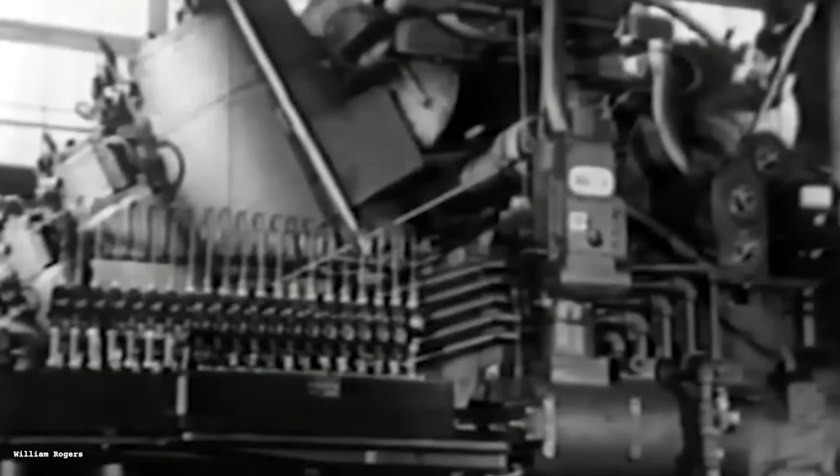The dark story behind the Cooper-Bessemer GMV, the engine that moved America's gas and was buried. Two brothers started a company in Ohio with $50 from the sale of a horse. 103 years later, the engine their company built was quietly running the entire American natural gas pipeline system.

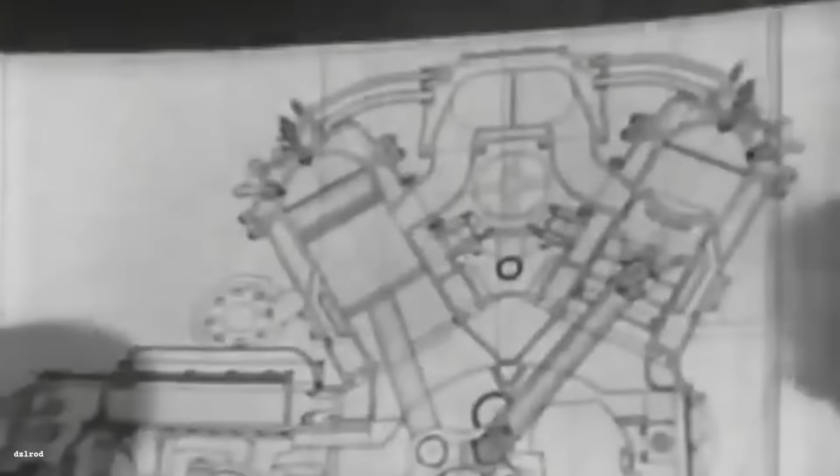Then the company grew up, moved away, and changed its name until nobody recognized it anymore. The engine kept going. Some of them are still running today. In fields, alone, in the dark.

Mount Vernon, Ohio, 1936, population around 8,000 people. Nobody outside of Knox County had heard of it, and most people inside Knox County had never left it. But there was a factory on North Sandusky Street that built things the whole world needed. It started, as most great American stories do, with almost nothing.

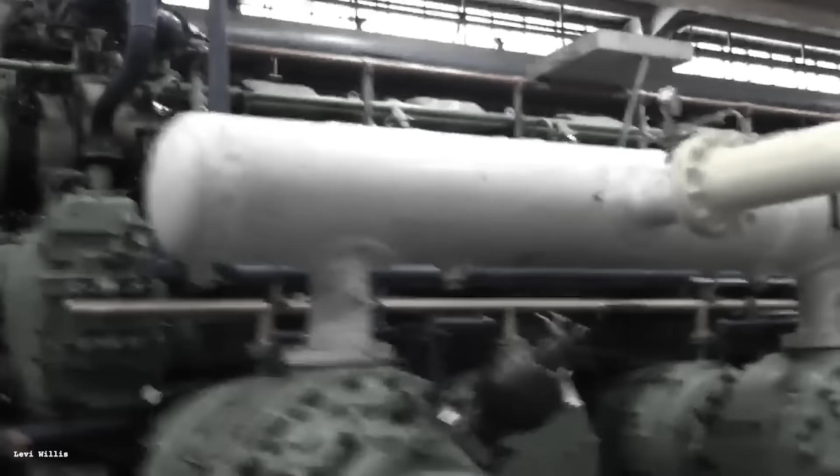It's 1833. Charles and Elias Cooper were two brothers from a farm south of town. They wanted to open a foundry. Between them, they had one surplus horse. They sold it. $50. That was the startup capital for what would eventually become one of the most consequential industrial companies in American history. For the first few decades, they made plows and kettles and iron stoves, standard foundry work.

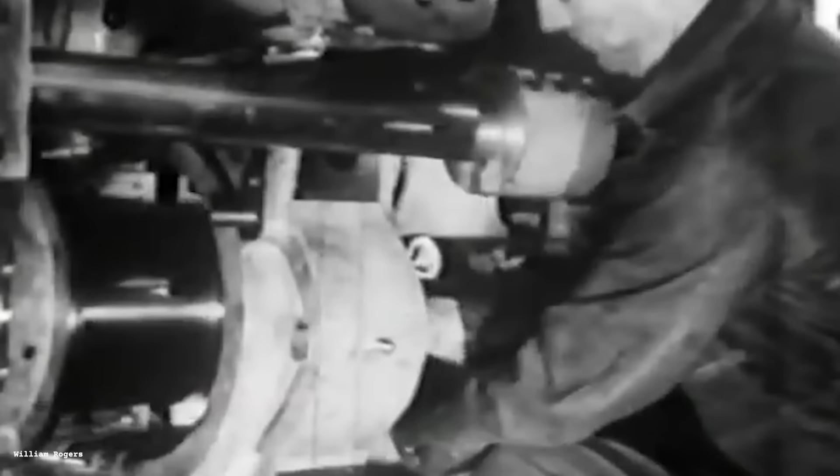Then they noticed something. Steam engines were everywhere, and the good ones were scarce. By the 1860s, they were building Corliss steam engines, the large industrial kind that powered mills and factories across the Midwest. By the 1870s, they had produced what was essentially the first commercially viable American farm tractor. And the Cooper Company kept finding the next thing before everyone else did. The next thing, in the early 1900s, was natural gas.

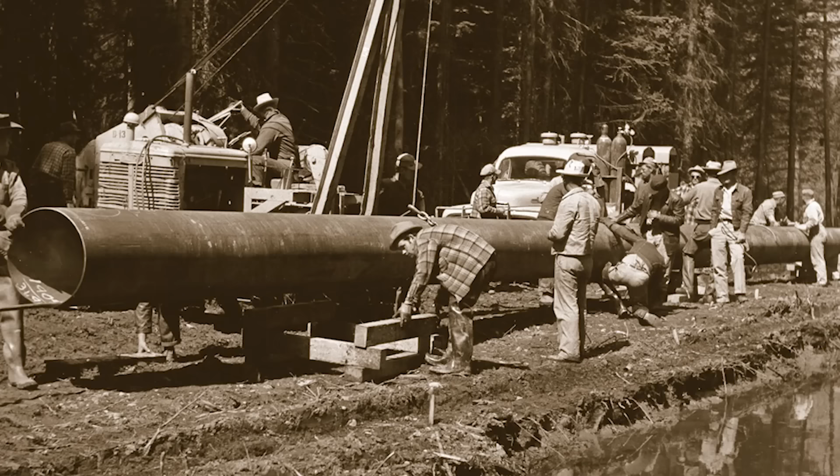There were deposits everywhere in the American Midwest, and nobody had figured out how to move the stuff efficiently over long distances. You needed pressure. To maintain pressure over hundreds of miles of pipe, you needed compressor stations. And to run those compressors, you needed engines. Powerful, reliable, slow-speed engines that could run continuously without breaking down for years at a time in a field somewhere with minimal supervision. Cooper was building exactly those engines, and they were getting good at it.

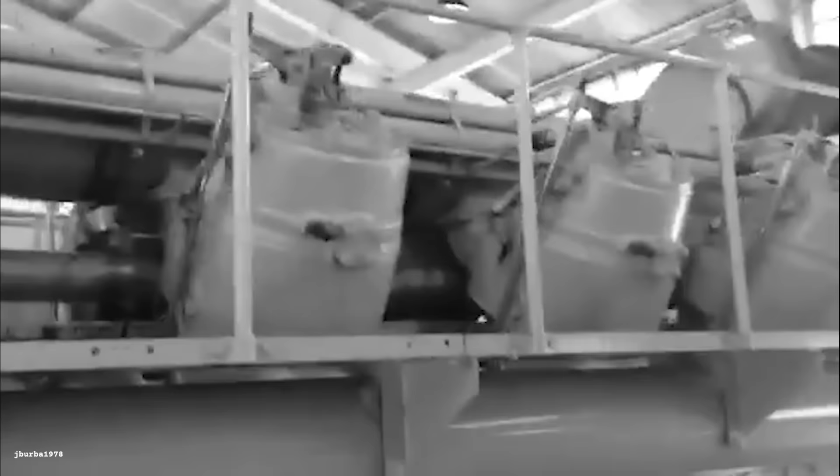In 1929, the C&G Cooper Company merged with the Bessemer Gas Engine Company of Grove City, Pennsylvania. Cooper needed more production capacity. Bessemer needed capital. Both had been posting nearly identical earnings for 3 years. It was a clean match. The new company was called Cooper-Bessemer Corporation. They listed on the American Stock Exchange. They were, briefly, the largest builder of gas engines and compressors in the country.

Then the stock market crashed in October of that same year, and they went from the largest builder in the country to barely surviving. For a while, you could walk up to the factory in Mount Vernon and run a machine for $5 a day if something broke down. That was the Great Depression at Cooper-Bessemer. Sales dropped more than 90%. The plant shut completely for months. But they survived it, and what came next was the engine that made everything.

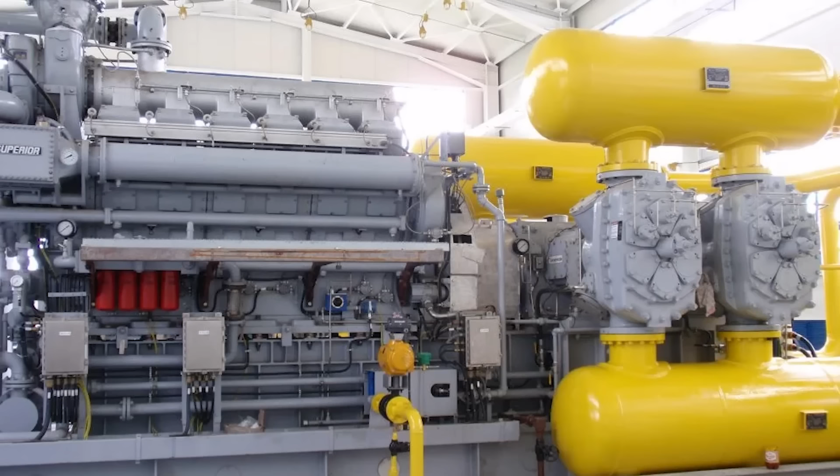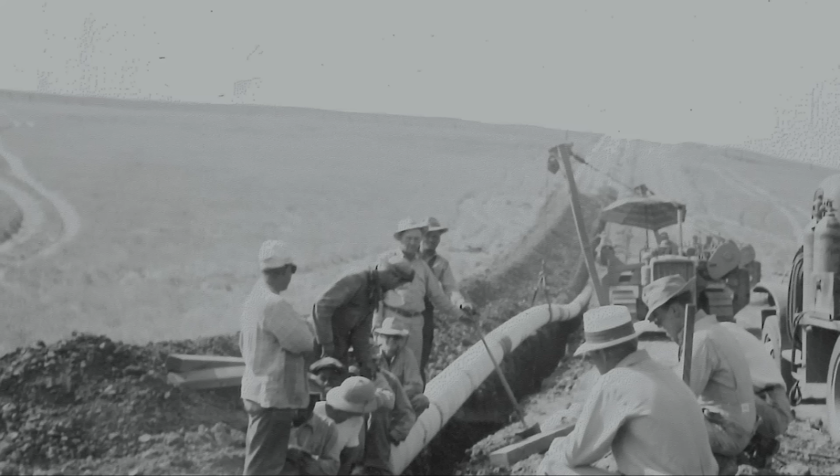Here is the problem that a man named Ralph Boyer was trying to solve in the middle of the 1930s. Natural gas was abundant in America. The Midwest and the South were full of it. The Northeast needed it. The coasts needed it. Moving it from one place to the other required pipelines, and pipelines required compression. Without compressor stations placed every 50 to 100 miles along the route, the gas simply stopped moving. The pressure bled off, the flow rate dropped, and the pipe became useless.

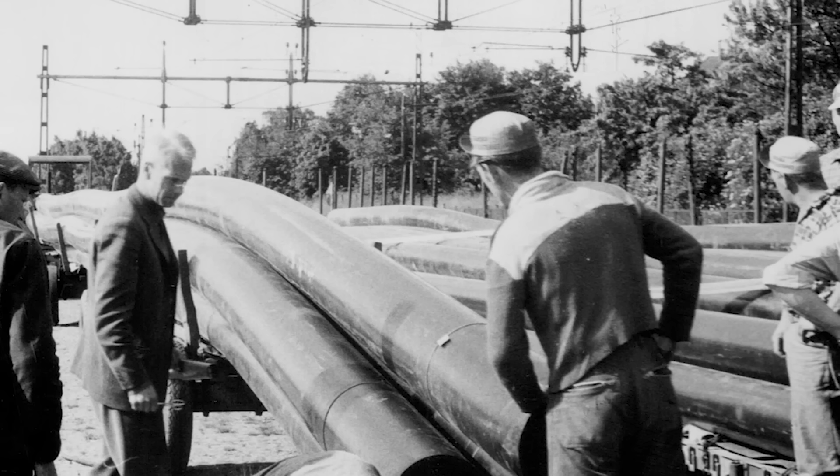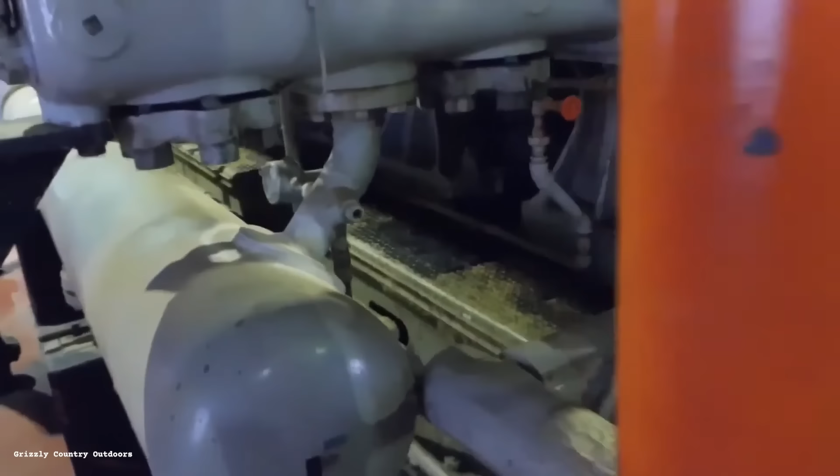The compressor station was the answer. A building somewhere in a field, housing an engine powerful enough to take the gas at whatever pressure arrived from the previous station, boost it back to pipeline pressure and send it on its way. That engine had to run continuously, not when someone felt like turning it on. Continuously. 24 hours a day, 7 days a week, 365 days a year, sometimes for years, without stopping.

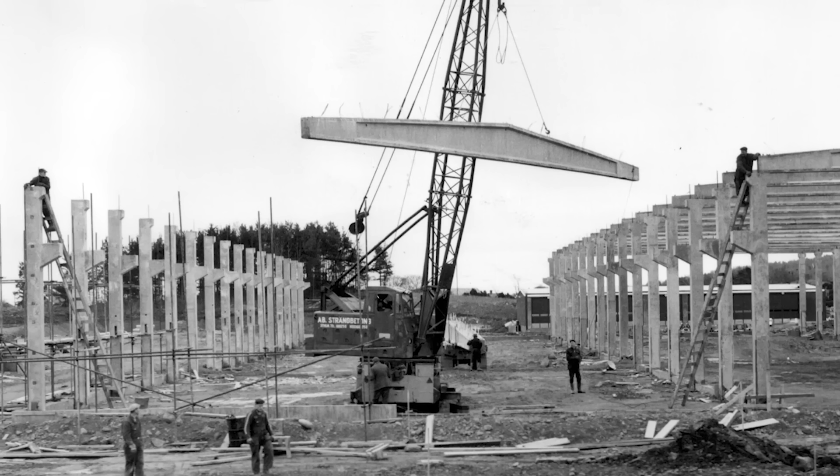The existing compressor engine designs in the 1930s were not built for that. They were large, they were complicated, they had too many parts that could fail, and they were not efficient enough for the economics of long-distance pipeline operation. Pipeline companies were building infrastructure worth tens of millions of dollars. They were not going to stake that investment on a machine that needed constant attention.

Boyer's assignment was to design something that didn't break down, something compact, something efficient, because gas engines running continuously consumed enormous amounts of fuel, something simple enough to be maintained by mechanics in a field, not engineers in a laboratory, and something reliable enough to run for decades without fundamental revision.

He had joined Cooper-Bessemer in 1926, and he would spend the next 4 decades there. The GMV was his answer. It was not a quick answer, and it came with consequences nobody saw at the time.

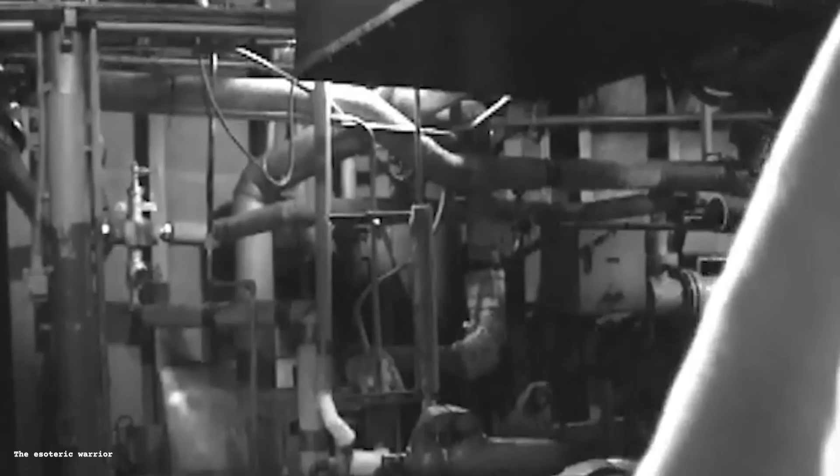The Bessemer merger in 1929 gave Boyer something he needed. Not just additional factory floor space. It gave him access to the Bessemer Gas Engine Company's engineering heritage. Bessemer had been building gas engines since the 1890s. Their people had spent 30 years learning what worked and what failed in continuous duty industrial applications. When the two companies merged, that accumulated knowledge came with them.

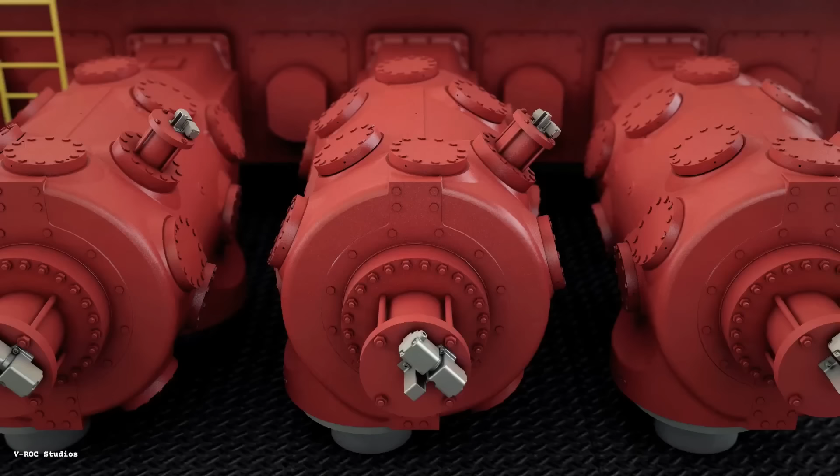Boyer spent the early 1930s experimenting. The fundamental challenge was mechanical. A gas engine and a gas compressor are very different things. An engine takes fuel and produces rotation. A compressor takes rotation and produces pressure. To combine them into a single unit, you had to make one machine do both jobs simultaneously, from the same crankshaft, using the same power strokes.

The standard approach at the time was to run compressor piston rods side by side with power piston rods, all attached to the crankshaft in separate throws. It worked. It was also bulky, generated high bearing loads, and had more moving parts than necessary. Boyer thought there was a better way.

His solution was the articulated connecting rod arrangement. Instead of running power and compressor rods in parallel, he designed them to share a single master rod. 2 power piston connecting rods drove onto one master compressor rod for each throw of the crankshaft. The angle between the engine cylinders and compressor cylinders formed a V-shape, compact, mechanically efficient, and with significantly lower bearing loads than the side-by-side approach.

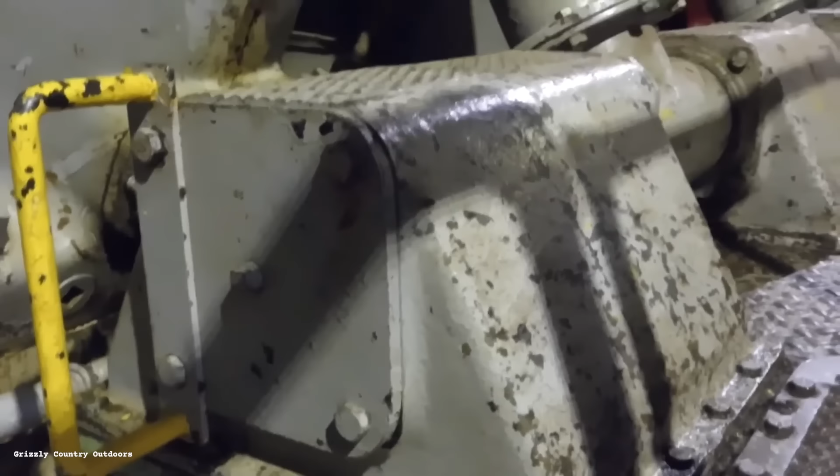Lower bearing loads meant less wear. Less wear meant longer service life. Longer service life meant exactly what pipeline companies were asking for. Boyer had the design, he had the factory, he had the backing of the merged company. The first GMV units came out of the Mount Vernon plant in 1936. They ran, and then they ran some more, without stopping, without complaint.

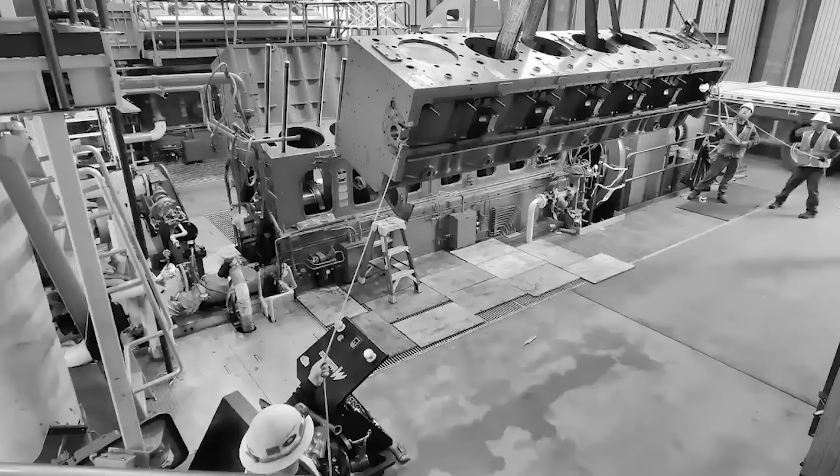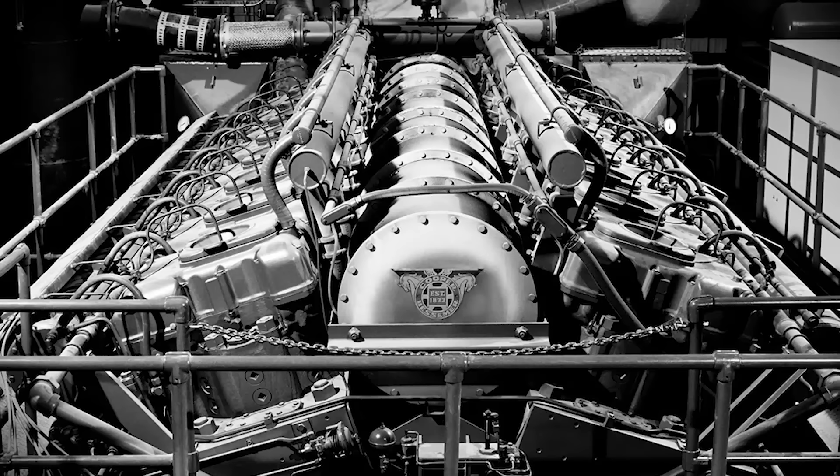Cooper-Bessemer built them in 4-cylinder, 6-cylinder, 8-cylinder, and 10-cylinder configurations, 4 cylinders to 10. Each cylinder was 14 inches across with 14 3/4 inches of stroke. The engine turned at 300 revolutions per minute. Slow, deliberately slow. At 300 revolutions per minute, the bearings barely worked up a sweat. The valve gear barely noticed. The entire machine operated at a pace that, compared to automotive engines, seemed almost leisurely. That was the point entirely.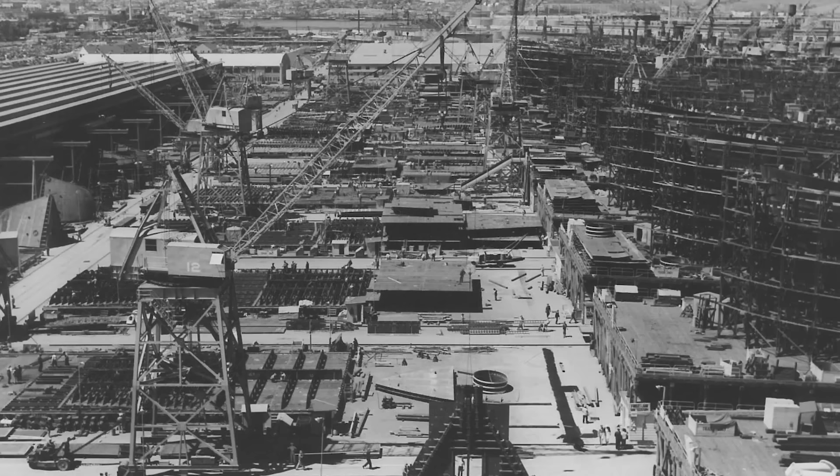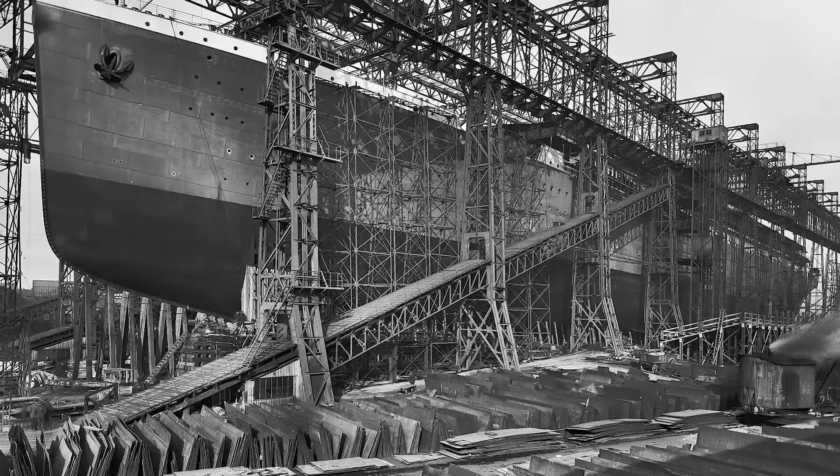The 1940s brought something Boyer and the Cooper-Bessemer engineers did not anticipate: World War II. The factory on North Sandusky Street pivoted almost overnight. The plant started building marine diesel engines for the U.S. Navy. They powered minesweepers. They powered tugboats. They powered rescue boats and patrol craft. They powered Liberty ships, those mass-produced cargo vessels that carried 75% of the material the Allied forces moved across the Atlantic. Cooper-Bessemer earned both the Maritime M Award and the Army-Navy E Award for wartime production excellence. Outstanding achievement.

When the war ended in 1945, the world changed fast. American soldiers came home and did what soldiers always do. They started families. They moved to the suburbs. They bought houses. They wanted heat and hot water and modern appliances. Demand for natural gas exploded, not increased. Exploded. Between 1945 and 1965, consumer demand for natural gas more than doubled in the United States. The existing pipeline network was nowhere near large enough to handle it.

About half of all the natural gas pipelines that exist in the United States today were built in the 1950s and 1960s. Roughly 300,000 miles of interstate and intrastate pipeline went into the ground during a 20-year window right after the war. In 1954 alone, American utilities were adding 800,000 new gas customers every year. By 1957, natural gas was providing nearly 23% of the nation's total energy supply, up from 12.6% in 1945.

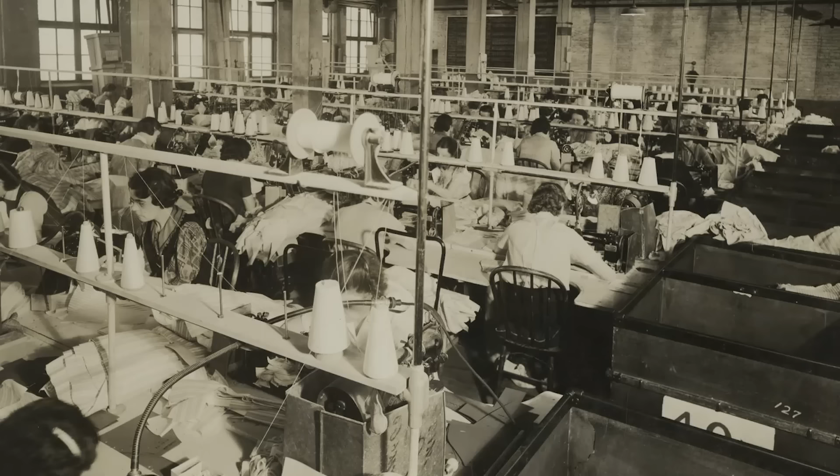Every single mile of new pipeline needed compressor stations. Every compressor station needed engines. The GMV was ready. Orders flooded in. The Mount Vernon factory ran flat out. At its peak in 1963, Cooper-Bessemer employed 2,400 workers at the Mount Vernon campus. The town of 8,000 people had a factory that employed roughly a third of the entire population.

As one longtime employee later remembered, everybody in Mount Vernon worked at Cooper once back in the olden days. Another said if you didn't like your boss, you could quit and have another job by 4 p.m. the same day. The GMV went everywhere. Not just across America. The engines were licensed for manufacture in Russia, Ireland, France, Germany, the United Kingdom, Japan, Italy, and Mexico.

They were installed in 43 countries. Whatever language you spoke, if you were moving natural gas through a pipeline, you almost certainly had a Cooper-Bessemer on your property. And then General Electric showed up.

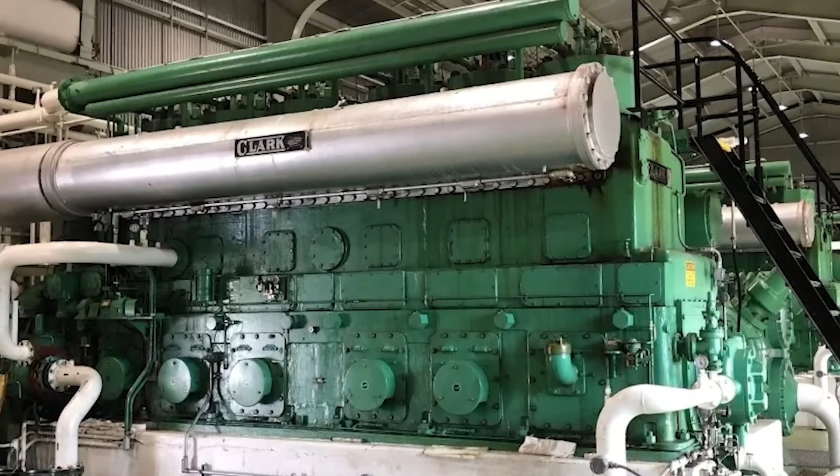In the 1950s, GE had developed combustion gas turbines for industrial pipeline use. The appeal was real. Turbines ran at higher speeds, could drive high-speed centrifugal compressors, and were better matched to the scale of newer, larger pipelines. El Paso Pipeline Company purchased 19 GE turbine-driven centrifugal compressors for its Southwest pipeline. Other companies watched. Then they followed.

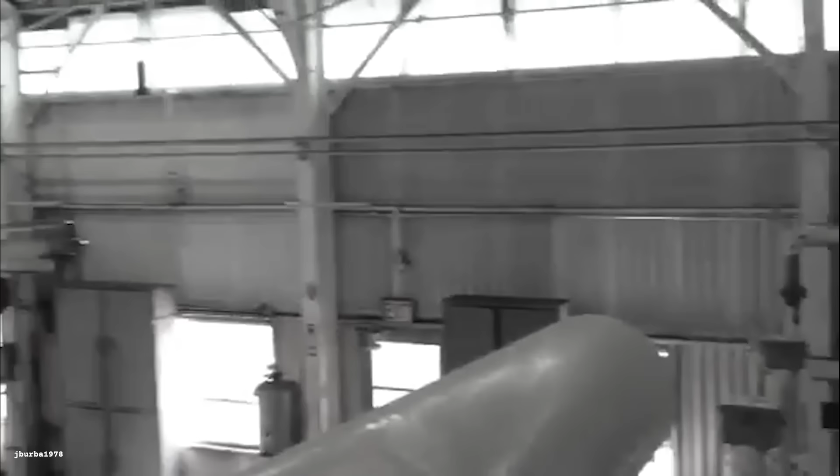Boyer saw the threat clearly. He said so, in retrospect, plainly. He later stated that the only way he could see to beat the gas turbines in a reasonable time was with a piston engine. He also admitted that was a serious mistake. The company president, he recalled, came to his desk every single day asking the same question: What the hell are you doing about a gas turbine engine? Boyer, who had spent his entire career building piston engines, tried to answer with a piston engine.

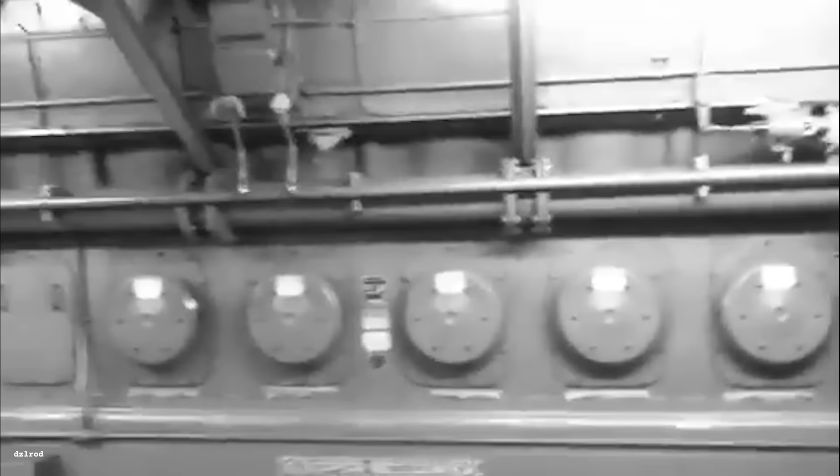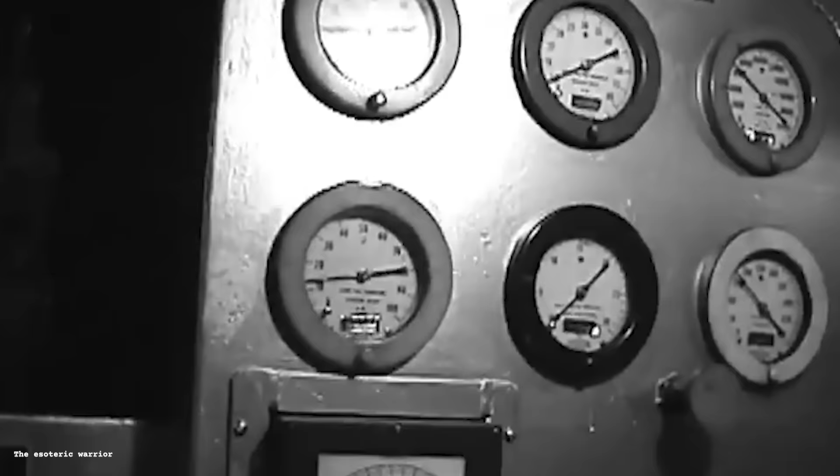Cooper-Bessemer spent the early 1950s developing a free piston engine in conjunction with the U.S. Navy, a genuinely innovative concept involving opposed pistons with no crankshaft, generating hot gas to drive a turbine. Test units produced the equivalent of 1,750 horsepower at 45% thermal efficiency, impressive numbers. But without a crankshaft controlling piston position, keeping the pistons from destroying themselves at the end of each stroke was extraordinarily difficult. If combustion timing slipped, the engine didn't stumble. It stopped, dead. The development program eventually died without producing a practical commercial machine.

In 1960, Cooper-Bessemer introduced the world's first industrial jet-powered gas turbine, a two-stage centrifugal pipeline booster driven by a Cooper-Bessemer power turbine using exhaust energy from a Pratt and Whitney aircraft jet engine. It worked. It was a real product. But GE had a years-long head start, and the pipeline market had already made its preferences clear. Cooper-Bessemer never caught them. Meanwhile, the GMV just kept running.

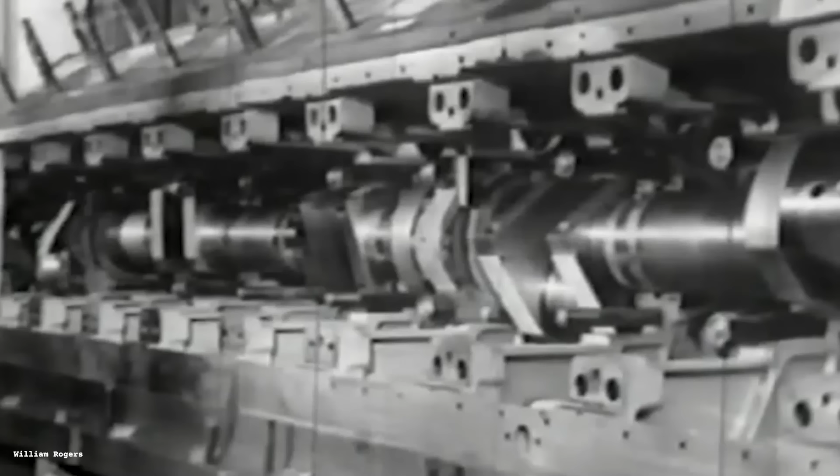Now let's talk about what the GMV actually was, mechanically, and why it held up for half a century in conditions that would have destroyed lesser machines. Start with the basics. The GMV was a two-stroke engine, not in the way a chainsaw is a two-stroke. This was a large-bore, slow-speed industrial two-stroke running on pipeline natural gas. A two-stroke means the power stroke and the exhaust and intake cycle happen once per revolution. Every revolution is a working revolution.

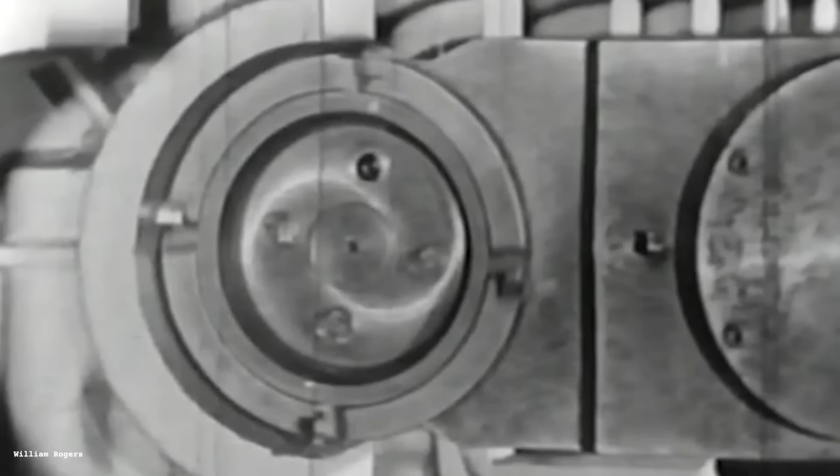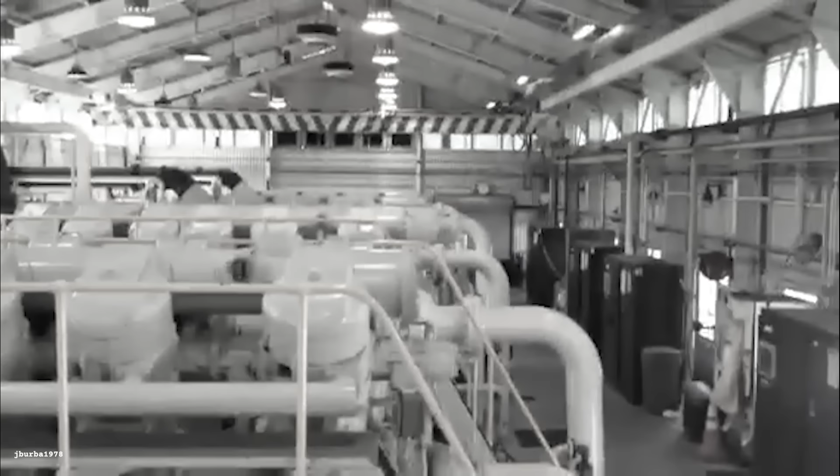Compare that to a four-stroke automotive engine, where every other revolution is the one that generates power. The GMV worked on every turn of the crank. At 300 RPM, that's 300 power strokes per minute per cylinder. Your car at highway cruise turns between 2,000 and 2,500 revolutions per minute, but only gets half those revolutions as power strokes. The GMV ran slower and worked harder in the most productive sense of that phrase.

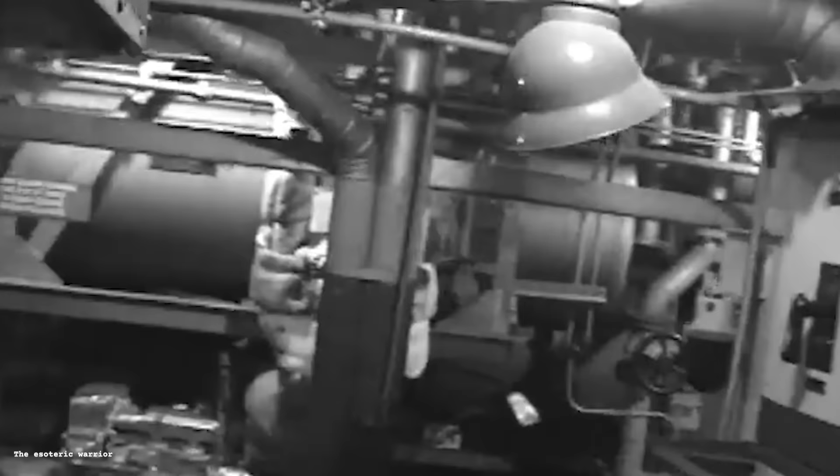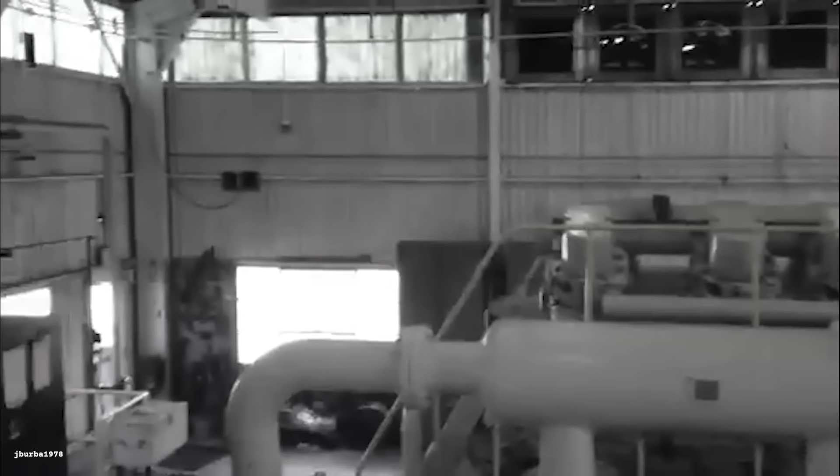The cylinder dimensions: 14 inches of bore, 14 3/4 inches of stroke. That is a cylinder more than a foot in diameter, with a piston traveling more than a foot on every revolution. The swept volume per cylinder, the volume of gas displaced in each power stroke, was enormous. On a GMV-10, you had 10 of those cylinders firing in sequence. The machine weighed around 70,000 pounds in its four-cylinder configuration. That is 35 tons for the smallest version of the lineup. It was not a machine you moved.

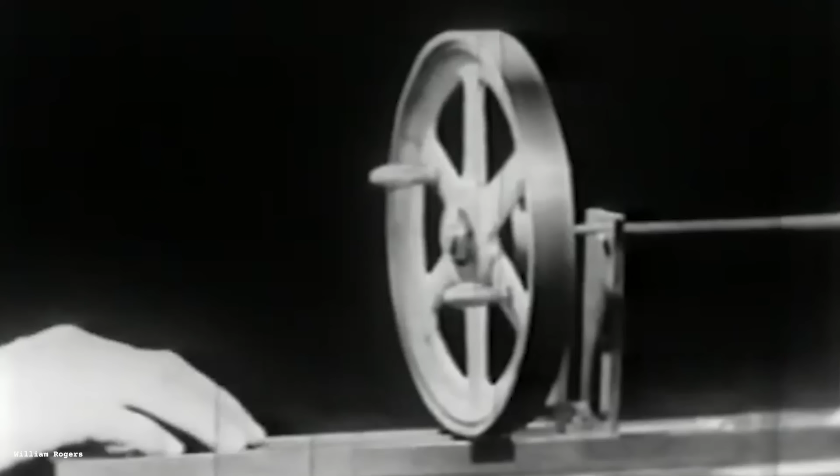The integral design was the key breakthrough. Standard compression setups of the era used a separate engine driving a separate compressor through a mechanical coupling: 2 frames, 2 lubrication systems, 2 sets of bearings. The coupling itself was an additional complexity and a potential failure point. Boyer eliminated all of that. The compressor was part of the engine. One machine, one crankshaft, one frame. The compressor cylinders that actually pushed gas through the pipeline were mounted on the same crankshaft throws as the power cylinders, linked through the articulated rod system.

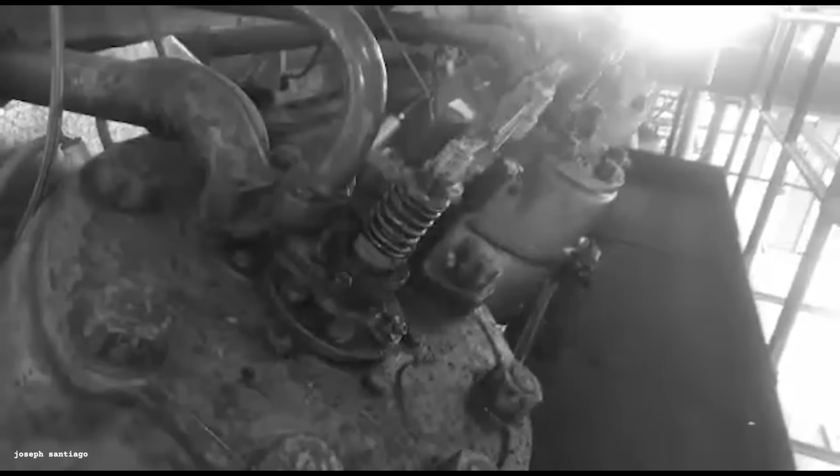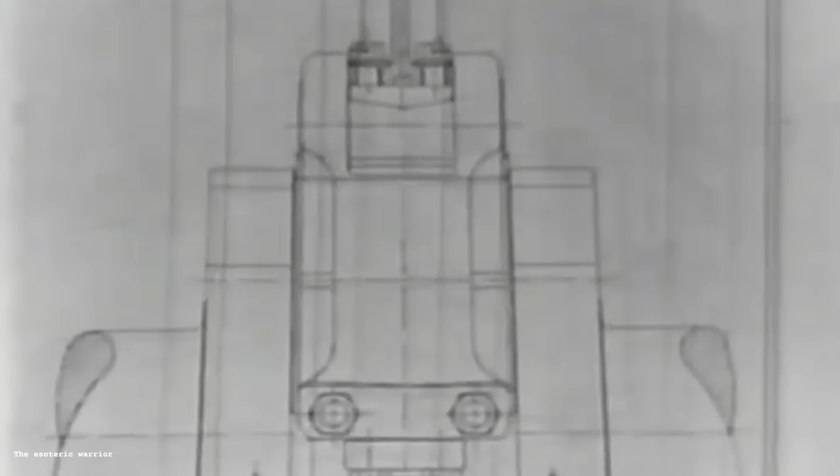That articulated rod arrangement deserves a second look. 2 power piston rods sharing one master compressor rod per crankshaft throw. The load path through the master rod was direct and efficient. The V-angle between engine and compressor cylinder banks, chosen to optimize bearing loads at operating speed, kept the forces on each crankshaft bearing well within the material limits of the day. Boyer and his team worked out that angle geometry using slide rules. No finite element analysis, no computer models, engineering judgment based on decades of experience, and it worked essentially without revision for more than 50 years.

The scavenging system, how the engine cleared exhaust gases and charged fresh air into the cylinder between strokes, evolved significantly over the production run. Early GMVs used mechanically driven scavenging via piston-assisted flow.

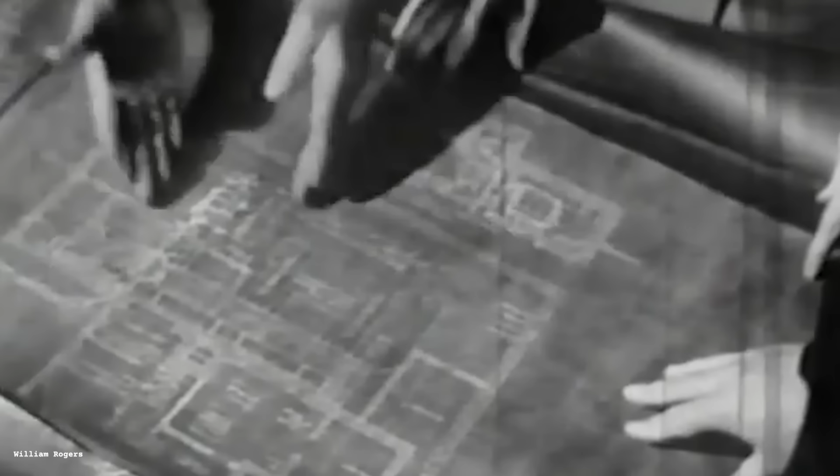Later variants added external blowers, then turbochargers. Each upgrade improved thermal efficiency and increased specific power per cylinder. Boyer later said the GMV was the most responsive engine in the lineup to scavenging improvements. Each upgrade in airflow management produced measurable output gains without requiring any change to the fundamental engine architecture.

Over the 55-year production run, these incremental gains roughly doubled the power output from the original 1936 specification. Same bore, same stroke, same crankshaft geometry, twice the output. That is what systematic engineering improvement looks like when the underlying design is genuinely sound.

The clean burn system introduced after 1978 added electronic control of air-fuel ratio and ignition timing to the GMV design. The effect on nitrogen oxide emissions was dramatic, enough to meet California's emission standards, which were at the time the most restrictive in the country. The same basic machine that Boyer had designed in the mid-1930s, now with electronic controls, was meeting late 1970s environmental regulations. That should not have been possible. It was.

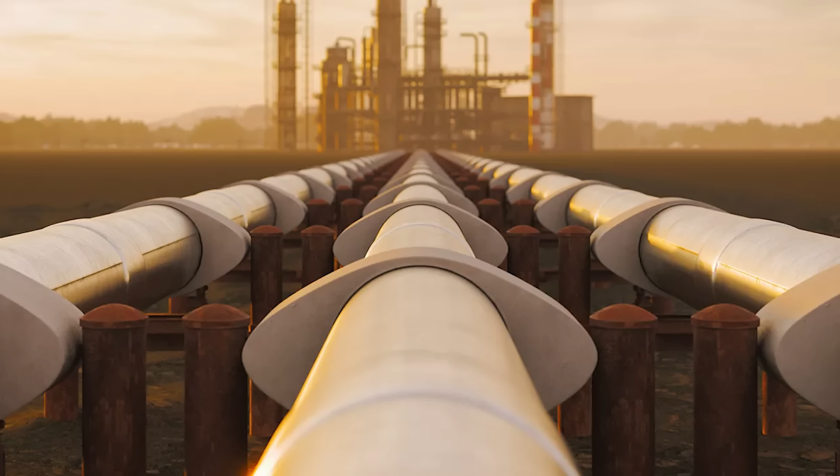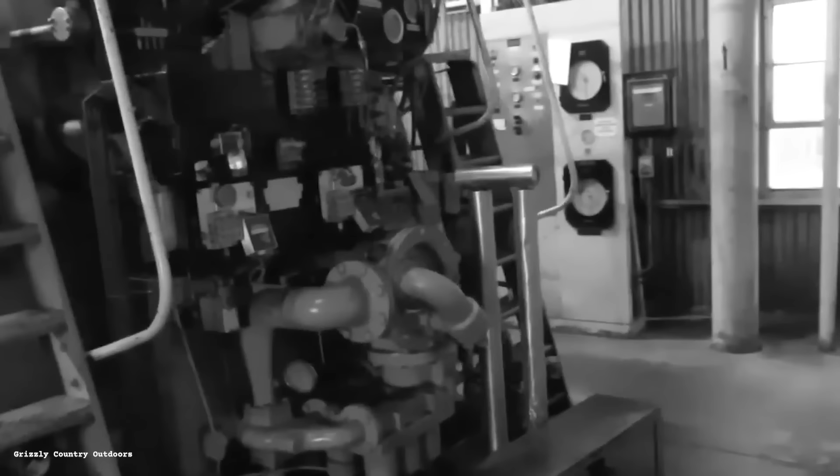The fuel source is worth noting. The GMV ran on pipeline natural gas, the same gas it was compressing. Approximately 2 to 3% of the gas flowing through each station was consumed as engine fuel, and the machine was, in a sense, eating a fraction of its own product to do its job. This was economically straightforward and operationally convenient. It also meant the engine and the pipeline were inseparable. The GMV did not exist alongside the gas transmission system. It was part of it. Remove the engine, and the gas stopped moving.

The sound of a running GMV became part of the professional identity of pipeline mechanics who worked around them. At 300 RPM, the exhaust pulses are slow enough that you can hear each one individually, a deep rhythmic percussion that vibrates the floor of the compressor building. Experienced operators could tell by ear whether an engine was running correctly. A change in note meant something. A change in vibration pattern meant something. The machine communicated through physical sensation, and the people who tended them learned to listen. That relationship between operator and machine is gone now. The people who knew how to hear it have mostly retired.

The GMV did what it was designed to do. It ran the American natural gas network through the biggest peacetime infrastructure build-out in the country's history. While politicians and planners and developers got the attention, the actual mechanical work of moving gas from the ground to people's homes was done mostly by this engine, in a building, in a field, that almost nobody knew existed.

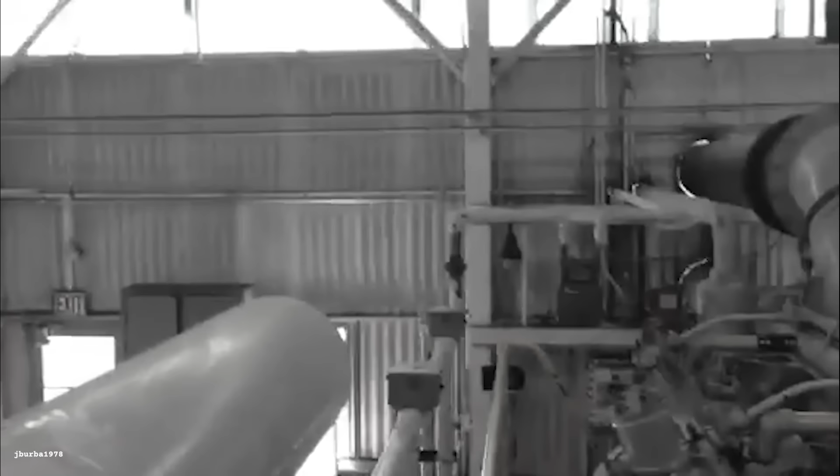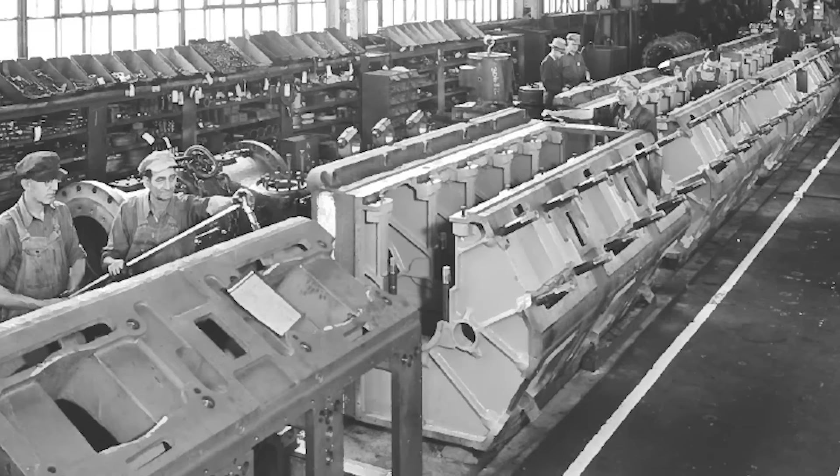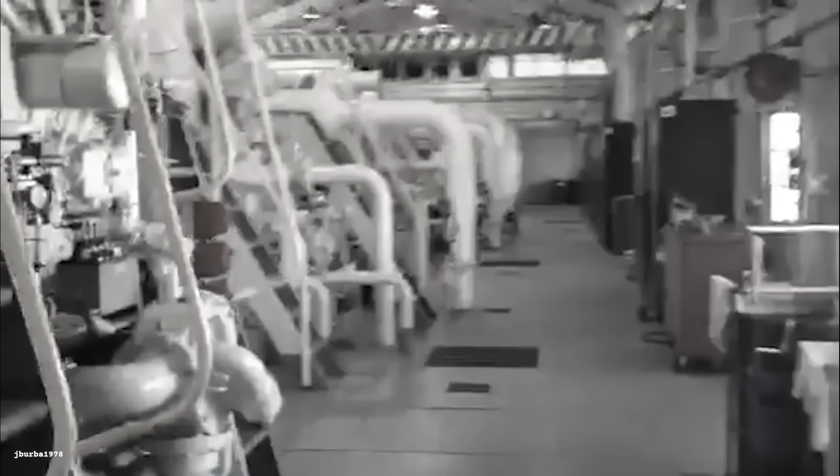Cooper-Bessemer adapted. By the mid-1960s, company revenue had grown from $68 million to $117 million annually. It had become a large and increasingly diversified industrial corporation, too diversified and too large, some argued, to remain headquartered in a small Ohio town. In December 1965, the company changed its name to Cooper Industries, reflecting how far it had grown beyond gas engines and compressors. 2 years later, the headquarters moved from the floor above the First National Bank in downtown Mount Vernon to Houston, Texas, the geographic mainstream of American business, as the annual report called it. That phrase did not mention what it was leaving behind.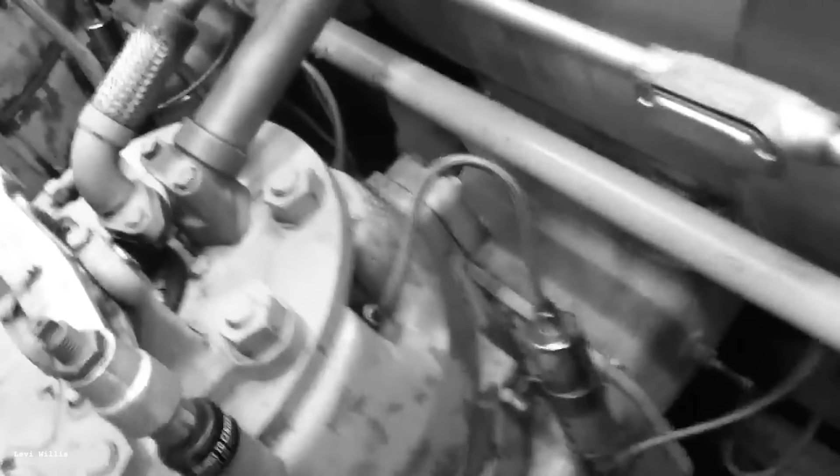On January 31, 1968, Charles G. Cooper retired. He was the grandson of co-founder Elias Cooper. His retirement ended 134 years of Cooper family involvement in the company that started with the proceeds from a horse. Nobody marked the moment particularly. It was just a retirement.

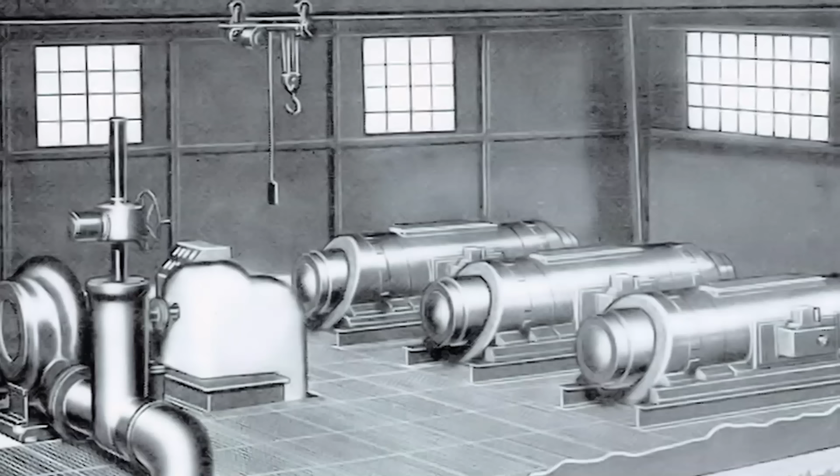The Mount Vernon plant continued producing. The GMV continued being built through the 1970s. But the decisions were being made in Houston, and the people making them were looking at the whole portfolio: hand tool companies, electrical equipment manufacturers, hardware brands, not specifically at the engine that had built the company. The gas and diesel engine business became one line item among many. Its share of revenue declined steadily.

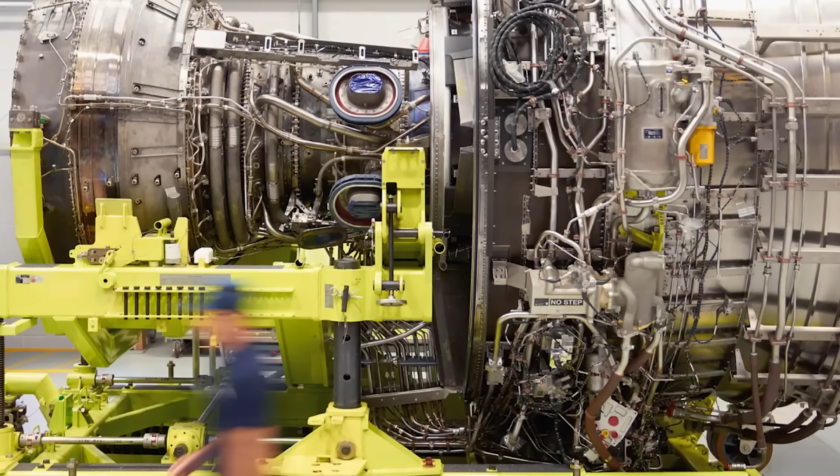In 1995, Cooper Industries spun off its petroleum and industrial equipment group as Cooper-Cameron Corporation. The Mount Vernon plant came with that spin-off. In 1999, Cooper-Cameron sold its rotating compressor business to Rolls-Royce for approximately $200 million. The Cooper name left Mount Vernon's factory signage for good. Rolls-Royce employed around 1,200 workers when they took over. They said the right things. Local officials said the right things. Things continued for a while.

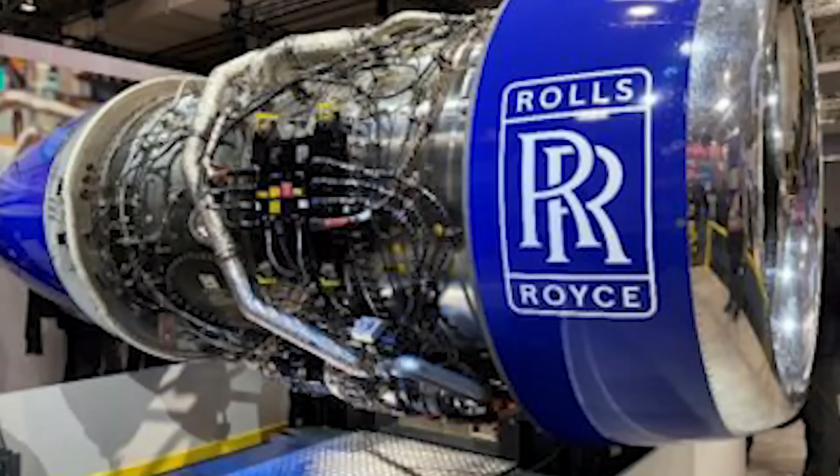Then the layoffs began. Slowly at first, then not slowly. Over 13 years, Rolls-Royce reduced the workforce by nearly half. By 2014, when Rolls-Royce sold the plant to Siemens for $1.3 billion, only 675 workers remained.

Six weeks after the Siemens signs went up, Siemens announced it was laying off 25 to 30% of the remaining workforce. In 2016, assembly and test activities transferred out of Mount Vernon entirely. In 2018, Siemens announced the final closure. 400 people lost their jobs on September 30th of that year.

The mayor called it a pretty big hit. That was not an overstatement. The 47-acre campus on North Sandusky Street eventually came to the Knox County Land Bank.

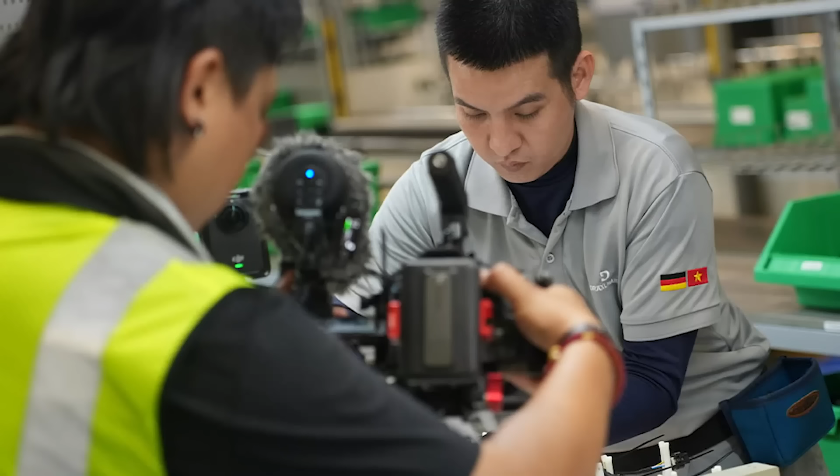In 2020, they renamed it Cooper Progress Park - a name on a sign, and a parking lot where the machines used to be. The Cooper old-timers, former employees who had been gathering for an annual potluck every summer since 1999, held what they knew would be their last reunion in 2023. In the early years, those reunions drew around 400 people.

By the final gathering, 140 came. Many had traveled from California, Texas, Oklahoma. They sat in the Knox County Historical Society building, in a room with a 70,000-pound engine in it, and talked about the place that had been the center of their working lives.

Here is where the story gets genuinely strange. The engine outlasted the company. The GMV production run ended. The factory moved on. The corporate name changed four times. The physical plant became a parking lot.

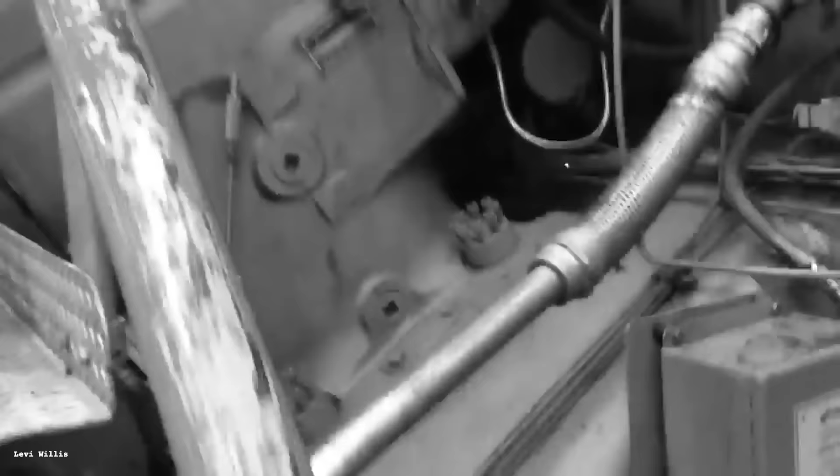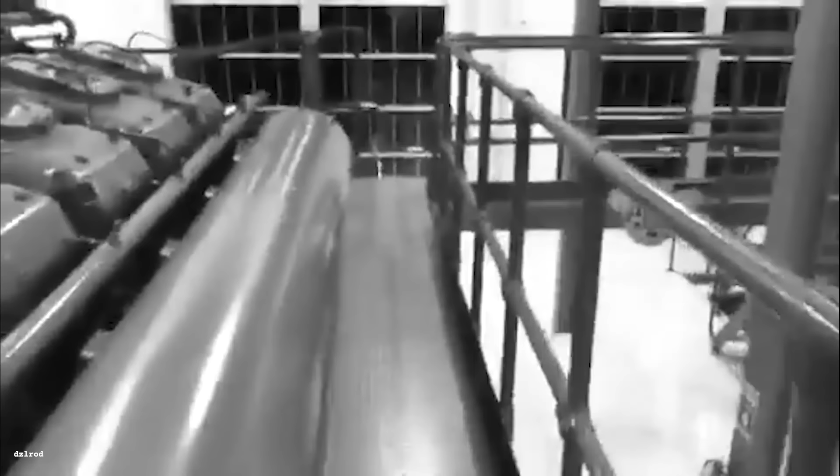But the engines were still in the ground, still connected to pipelines, still turning over at 300 revolutions per minute in compressor stations from Louisiana to Kansas to Pennsylvania to the Pacific Northwest. As of the most recent pipeline industry assessments, more than 2,000 GMV model engines were still actively operating in the American natural gas transmission system.

Some of those machines were manufactured in the 1940s. They have been running continuously - with maintenance, with component replacements, with the occasional field repair using fabricated parts - for 80-plus years. No fundamental redesign, no replacement of the basic mechanical architecture that Boyer drew up on a drafting table in Mount Vernon, Ohio, in the 1930s.

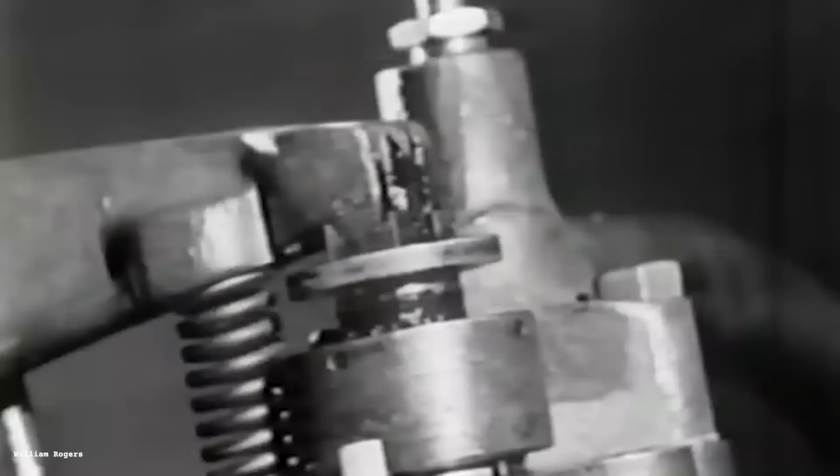The American Society of Mechanical Engineers designated the GMV a historic mechanical engineering landmark in 2006. The designation plaque sits in the Knox County Historical Society Museum next to the actual GMV-4, built in 1944, operated until 2002, and still capable of running today. It weighs 70,000 pounds, and it fits in a museum.

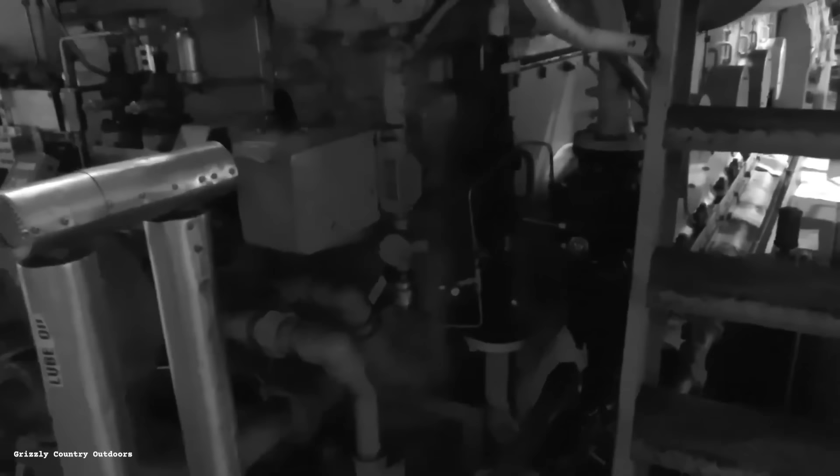The remaining fleet now faces a different kind of challenge. Modern EPA regulations on stationary reciprocating engines target both nitrogen oxides and unburned methane. Methane is a greenhouse gas roughly 28 times more potent than carbon dioxide, and the two-stroke combustion cycle of the GMV produces measurable methane slip - unburned gas escaping without being oxidized.

Colorado State University currently operates a GMV test engine specifically to research emission reduction techniques. Results suggest high-pressure direct fuel injection and optimized timing can cut methane emissions by roughly 50%. Whether that is enough to keep 2,000 aging engines running under tightening future standards is an open question.

Replacing a GMV means replacing the foundation, the building, and the entire compression system around it. Not cheap. Upgrading an existing engine with modern controls costs less. Pipeline operators are running both calculations, and the answer differs at every station. The machine that built modern American energy infrastructure is itself now in need of a plan.

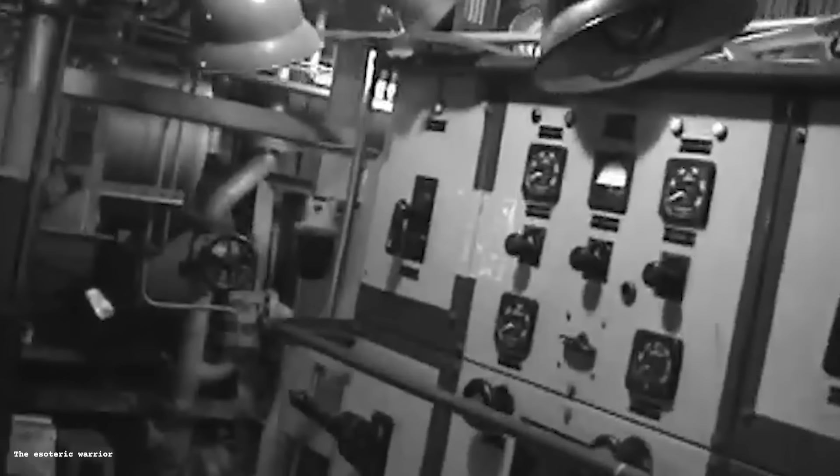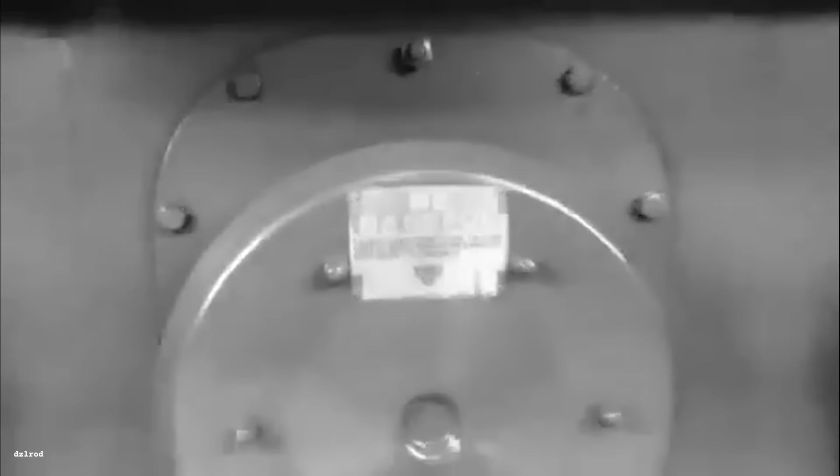Two brothers sold a horse and built a foundry. A hundred years later, a man named Ralph Boyer designed an engine in that same Ohio town, and that engine heated American homes for the next 50 years without anyone outside the industry knowing it existed. The company grew up and moved to Houston, and changed its name and its priorities and eventually its identity. The factory got sold to a British company and then to a German one, and then it closed.

The Cooper old-timers held their last reunion. The engines kept running. There is something worth sitting with in that. The machines that built the modern world have a habit of outlasting the organizations that built them - quietly, in compressor stations, at 300 revolutions per minute, 24 hours a day, 7 days a week, whether anyone remembers them or not. That is not a metaphor. That is just what they do. And that is the story of the Cooper-Bessemer GMV.